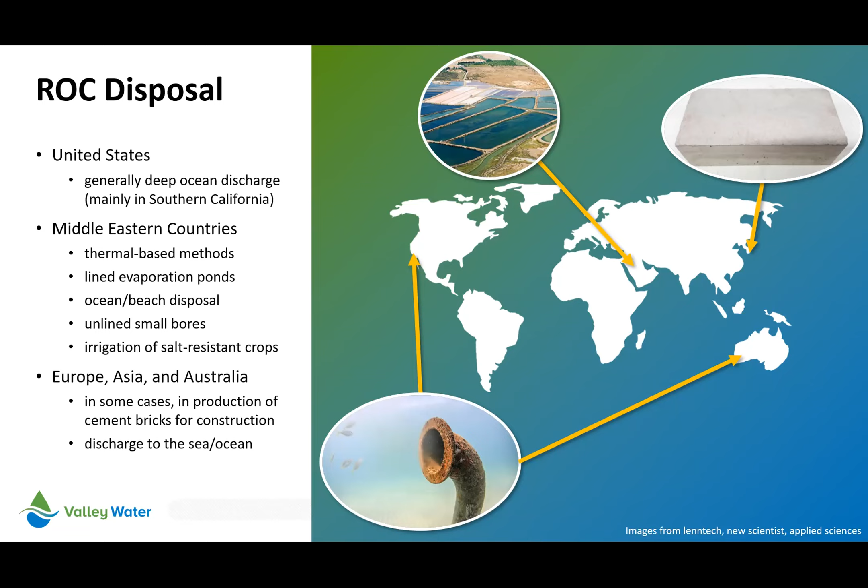So why is Valley Water concerned about our concentrate? Well, the journey really started about 8 years ago when the City of San Jose and Valley Water joined forces to build the largest purification facility in Northern California, which is called the Silicon Valley Advanced Water Purification Center. The capacity is 8 MGD, but generally it averages about 5 to 6 MGD when it operates. It can go up to 10 MGD if we add additional modules.

It's a very nice facility. Some of you may have seen it, and it's open for tours, of course, now that COVID is sort of gone, in a sense. It includes sophisticated systems such as microfiltration, RO system, and UV disinfection. And it produces purified water that is put back into the recycled water system for South Bay Water Recycling to decrease the TDS of that water. So that water becomes more suitable for other uses such as cooling towers, etc.

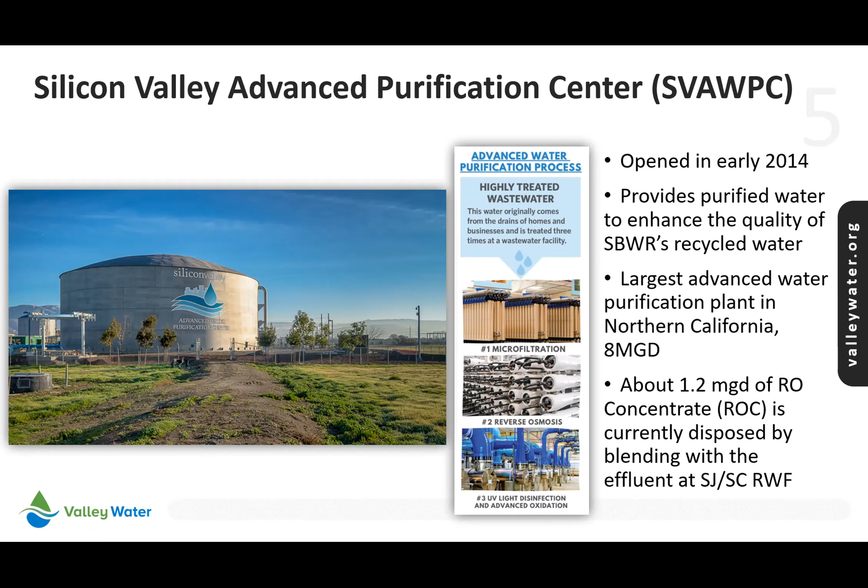Luckily, the regional wastewater facility, where the source water for the purification center is, is a large wastewater treatment plant. I used to work there for 11 years. So the capacity of this system is about 110, 120 on average of treated wastewater. So blending about 1 million gallons of RO concentrate with 100 million gallons of treated wastewater and then putting it into the bay is not a problem. So it's not a big challenge. The challenge in this case has been met through blending and dilution.

However, Valley Water has moved forward with looking at more reliance on local water supplies. And we embarked upon a large master plan several years ago to look at increasing our recycled and purified water for local use, and hence reducing the reliance on imported water and being more resilient in the face of climate change, etc. And the master plan identified several projects, one of which is gaining traction and would be implemented.

This project would bring a 10 million gallon per day purification facility in Palo Alto, taking the water from the wastewater treatment plant at Palo Alto, purifying it, and then providing that 10 MGD on average of purified water for various uses. The use that is identified at this juncture is IPR, or indirect potable reuse. So we'll use that water to recharge the groundwater in the Los Gatos area and then pump it back up and serve the public.

Throughout this master planning, one of the main components of this master plan was RO concentrate management. And I was tasked with looking at various options for managing the RO concentrate that would come from the future purification centers. Currently, our potable reuse is looking at the horizon of 2040. By 2028, we are looking at having the 10 MGD facility built and delivering water. So it's not that far away. So we need to hurry up and find the best options for our concentrate management.

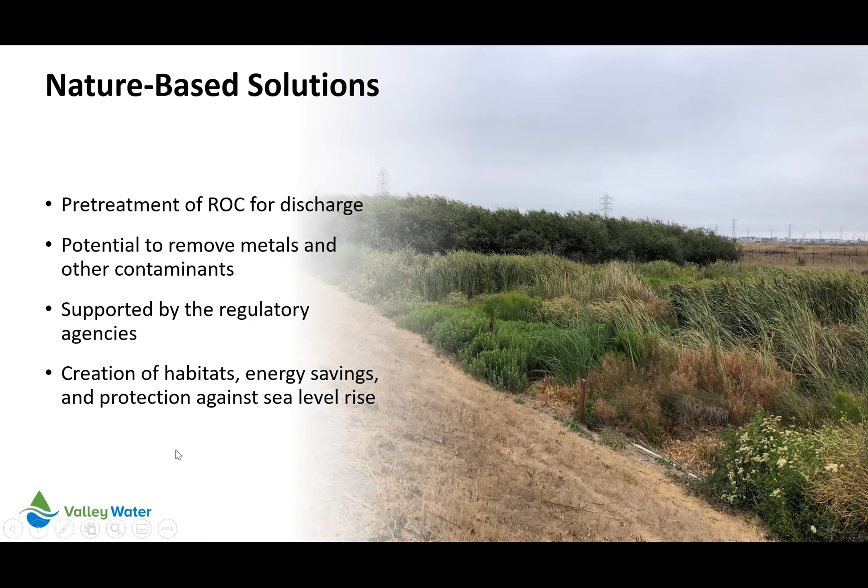For some reason, my screen got, okay, there we go.

Anyone who has been familiar with these systems might have seen some form of them at work. And we looked at a couple of these prior to jumping into doing actual pilot and research. One of them was Oxnard. They did a pilot for 6 months, and this was basically plants in a shallow wetland, and they looked at the removal of contaminants. It showed good results. It was a short pilot study, but nevertheless, the results were sort of impressive.

Goodyear, Arizona tried it. Theirs was in the form of floating wetlands. So these are plants that you select very carefully, based on their resiliency against high TDS and capacity for removal of contaminants. You put them on platforms that are not actually touching the bottom of the wetland, and you just float them, and the roots float in the mid level of the liquid, and they absorb contaminants, and they grow and thrive, and you just tether these platforms to the ground and control them on a large scale.

The pilot systems, of course, you don't get into that much detail, but you put them into small bins and then study them. So Goodyear, Arizona did an 8-year pilot on this, and they noticed that the media were definitely effective in removing some of the potential constituents. Their focus was mainly on selenium, though. Not much data on other contaminants, but selenium definitely was focused on, and it did show good promise.

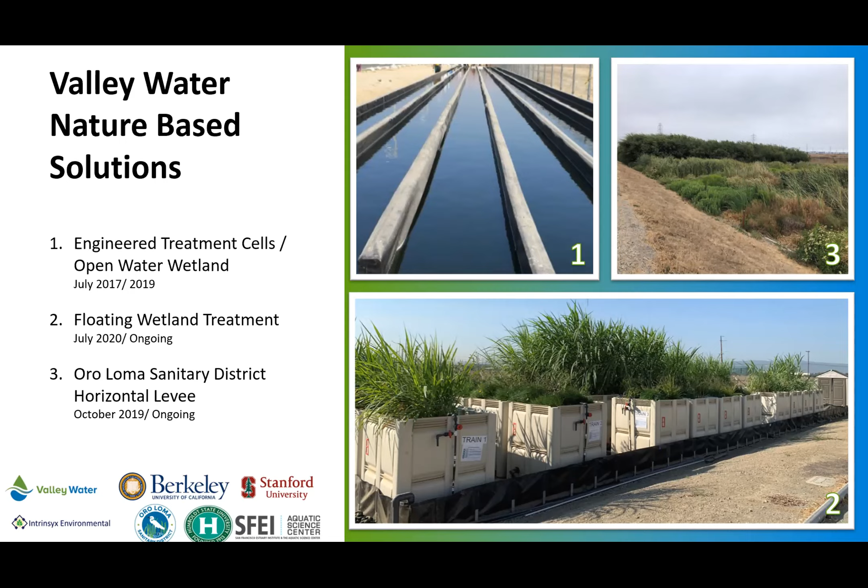So our engineered treatment cells basically showed nutrient removals, and we also used ozonation to enhance the removal rate, and we saw better results with ozonation. I wanted to take this opportunity to thank our partners; San Francisco Estuary Institute, Stanford University, and UC Berkeley were our partners in this project.

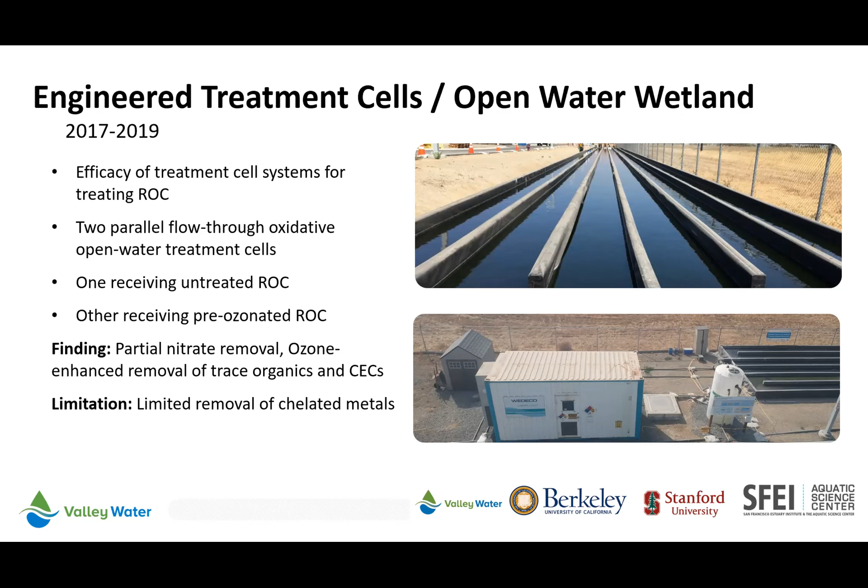It showed limited capacity for removal of chelated metals, and chelated metals are contaminants that exist in most wastewater treatment plant discharges, and they are governed by the NPDES permit. So naturally, we're interested in that because we need to meet the future limits on discharge.

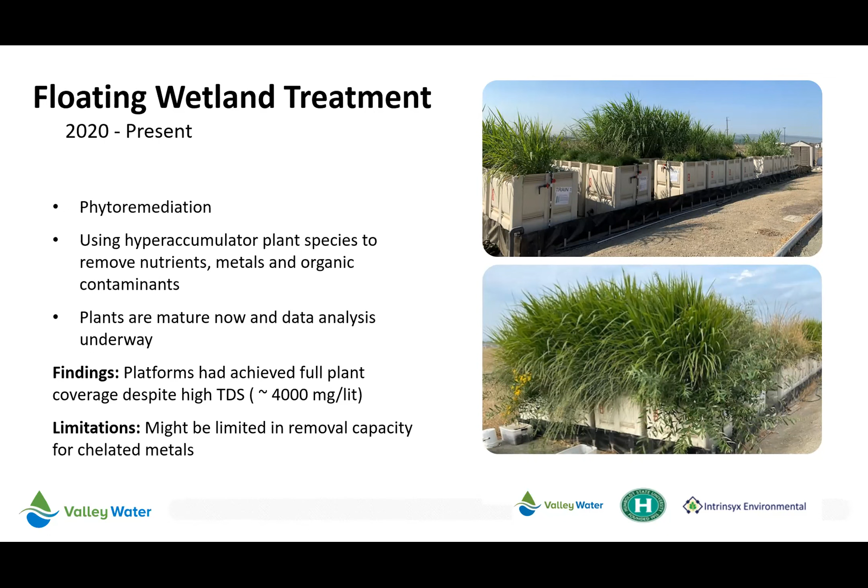Floating wetlands, which is ongoing right now, uses hyperaccumulator plants and a phytoremediation process. Again, Arizona tried this. We have been successful in thriving the plants, even though the TDS is about 4,000 milligrams per liter. The plants have shown good health, and we are in the process of collecting data right now. So that's moving forward.

Horizontal levee is probably the most promising at this juncture. Horizontal levees are basically natural slopes that you work out in a way that they seep into the slope of the ocean or sea. And behind it, you can have a regular sea level protection wall.

In front of it, you put the horizontal levee. You introduce the wastewater that you want to be polished, stormwater that you want to be treated, or RO concentrate in our case. And that sort of has a subsurface flow, goes into the horizontal levee, flows under the surface, and contaminants get removed or reduced. And then it kind of seeps into the ocean and blends with the incoming water from the wave actions.

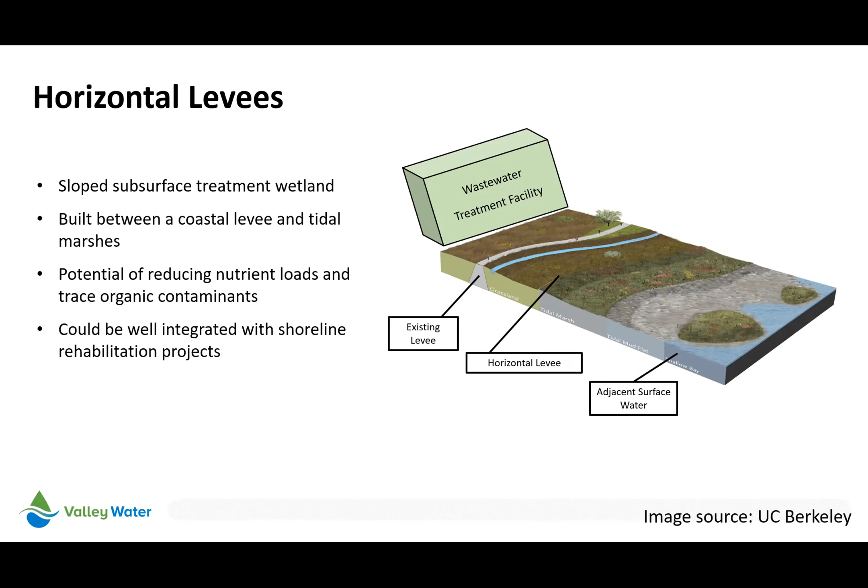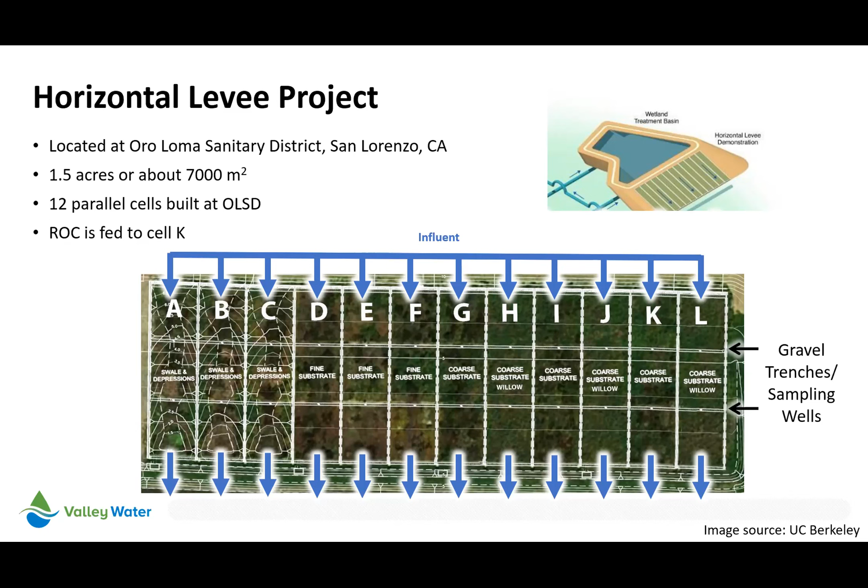The one that we are experimenting with in Oro Loma is a pilot system. It's fairly large, but it's at the scale that you call it pilot. It's located at San Lorenzo. It has 1.5 acres of area and has 12 parallel cells. Some of these are used to look at the polishing effect of horizontal levee for treated wastewater, and some are looked at for RO concentrate management and treatment. And at this juncture, one of the cells has been divided into several cells, and it is dedicated for RO concentrate. In the next phase of the project, we'll be adding additional cells and more rigorously focusing more on RO concentrate.

So this project started in 2019, and we have been trucking water from our advanced water purification facility in San Jose and putting them into these tanks, and then gradually feeding those cells that I showed you in the previous slide. Roughly about 10,000 gallons per week are being transported since 2019. So we have good data. Removal of nitrates, trace organics, and other contaminants have been observed.

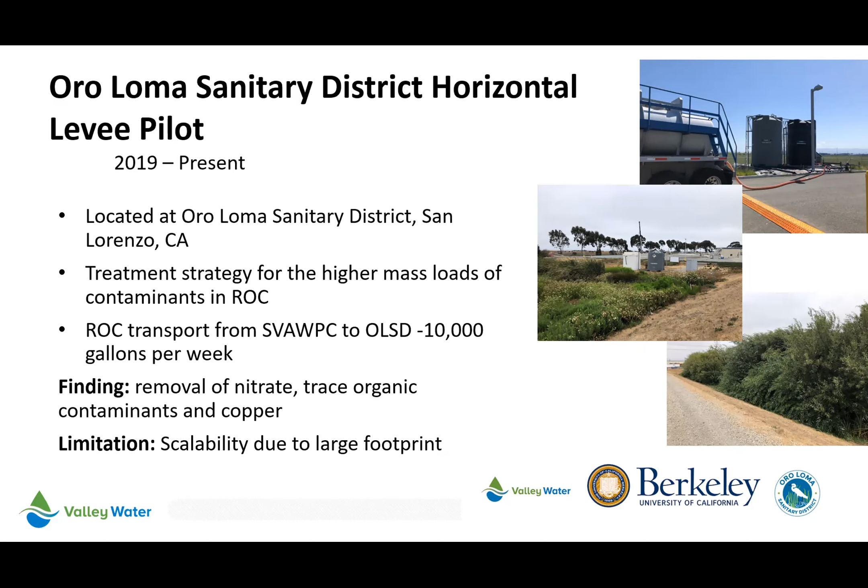And scalability might be a challenge, but phase 2 would give us more information that we might be able to figure out a way to reduce the footprint needed for a large volume of RO concentrate, because we have noticed that the treatment really occurs within the first 100 feet of the run of the cells. You can see good removal up to 80%. So it could be that you don't need a huge footprint for a horizontal levee to achieve good treatment or acceptable level of treatment for RO concentrate.

So in conclusion, to wrap it up, so far in the nature-based solutions arena, we have looked at horizontal levee, engineered treatment cells, and floating wetland pilots, and all of them show a certain degree of removal and promise. And nature-based solutions would have great potential for resiliency, creating habitats, and being part of the solution for managing the challenge of RO concentrate. So I guess we'll be working more with our regional partners on this.